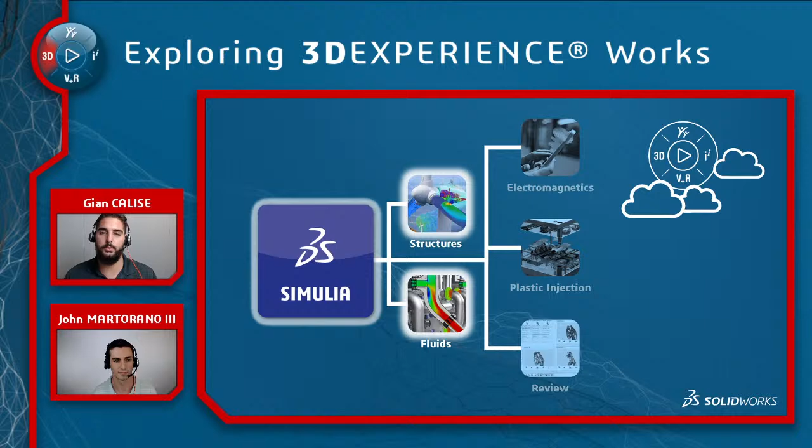But today we brought on a couple special guests to show structures and fluids. So that's what we're going to focus on today. To talk about those, we have Shreyas and Ramesh joining us to talk about structures and fluids today. So without any further ado, let's get you guys on screen.

How's everybody doing today? Hey, welcome, John. Hey guys, Gian. Hey John, Gian, how are you guys doing? Good to be here. Oh, great to have you. Yeah, good to be here. Great to have you. So Shreyas, you're our structures guy. Tell us a little bit about yourself, your background. What are we going to see today?

Yeah, absolutely. So today I'm going to show you some really interesting capabilities the 3D Experience platform has, specifically the structural mechanics engineer role on the 3D Experience platform. The data set I'm working with today is from a Formula SAE car, which is basically an impact attenuator assembly on a Formula SAE car. It's a front crash structure, so we are going to see that in action, and then see some tips and tricks as far as the structural mechanics engineer role is concerned. Let's see it, let's get right into it.

Yeah, absolutely. But before that, Gian, what I want to do is give our audience a quick high-level overview of different structural solutions that we have on the 3D Experience platform. The first one we have is called the structural designer role. Now, let's say you're a designer or engineer interested in doing a linear static analysis, frequency or buckling analysis, even thermal analysis. Then probably the structural designer role, our entry level offering, is best fit for you.

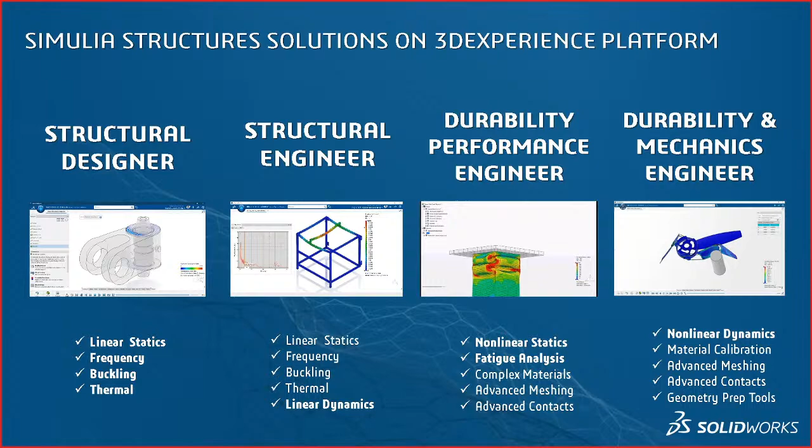And then we have our final offering, which is called the durability and mechanics engineer. This is our high-end offering. It comes with tools and features that will let you do a nonlinear dynamic analysis, and it also comes with a material calibration app that I am going to explain in today's presentation. So yeah, that's our structures solutions on the platform.

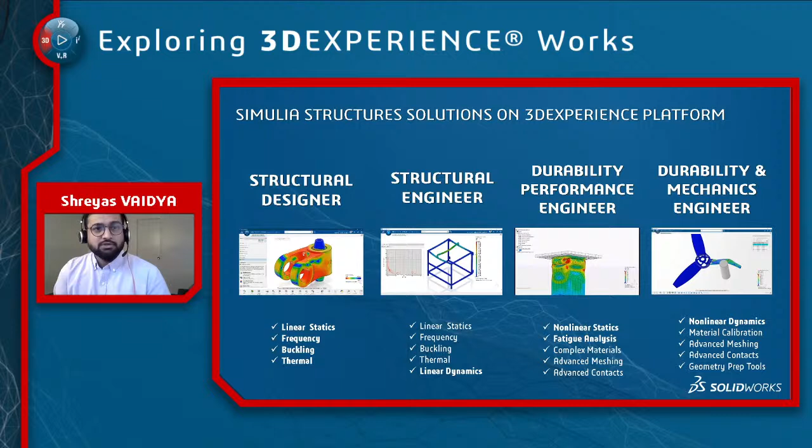So I want to give you guys a quick context about what Formula SAE is. I'm sure it sparked some interest in our audience. You may be currently working on a similar project, or may have worked on one in the past. Formula SAE is basically an engineering design competition where students from across the university come together to build a single-seater Formula style race car, which typically should look something like this that you see on the screen.

The challenge in these competitions is, look, it's definitely a race car, you want it to be fast, but apart from that the main goal is to come up with a well organized, well engineered overall package, backed up by a robust financial and sales planning.

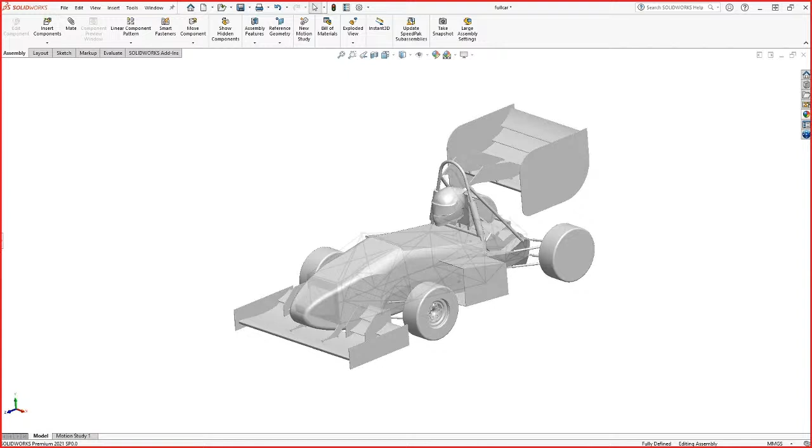So today I'm working with a data set called an impact attenuator assembly on a Formula SAE car, and I would like to give you a quick preview of what it looks like. We have a space frame chassis of an FSAE car, and then we have an impact attenuator assembly attached to the front of it.

What this really is, is a crash structure that has to absorb a certain minimum amount of energy and decelerate the vehicle in a controlled manner. So the physics we are trying to simulate here is: we have the rigid barrier, we have the foam, and the anti-intrusion plate that makes up the impact attenuator assembly.

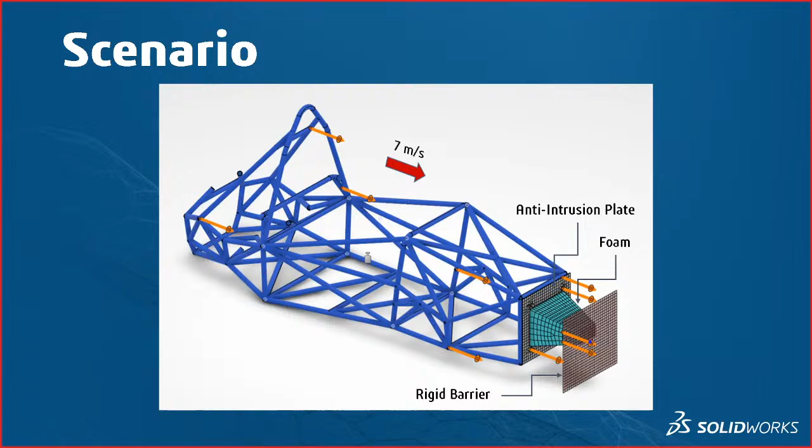What we are going to do here is crash this assembly into the rigid barrier at a speed of 7 meters per second. So that's the scenario I am trying to demonstrate today through this presentation.

Before we move further, I want to show you a quick visual roadmap of the 4 important things we are going to cover through this presentation, which I'm really excited about. First: Solidworks to 3DEXPERIENCE, how to transfer your model, your assembly, from Solidworks, which is your primary CAD tool, to the 3DEXPERIENCE platform.

Then we'll take a quick dive and look into how we can set up material from the test data that we have, and how we can calibrate it using the material calibration app.

And then I'm going to show you some interesting technologies that will be useful for you to set up your model, set up the scenario, and also show you some tips and tricks as far as post-processing our results are concerned.

And then I'll show you the workflow where we can go back to SolidWorks, make the design change we want based on the results that we got, and then come back to the platform again. So let's go ahead and start with our first important point that we want to see.

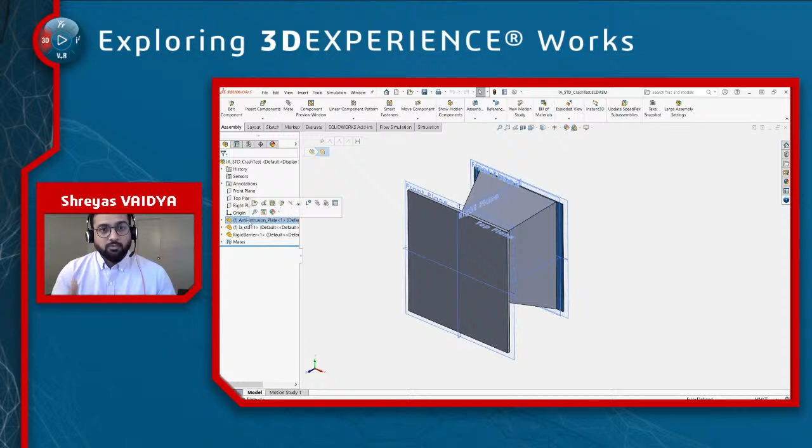So let's say you have an assembly in SolidWorks. In this case, we have an impact attenuator assembly, which also comes with a rigid wall. So we have the foam, we have the anti-intrusion plate.

So all I have to do is first make sure that we have the 3DEXPERIENCE add-in checked in. After that, it's really simple, guys. What we have to do is just click on the assembly that I want to take to the platform, and then through the compass on the top left corner, select an appropriate app that I want to push my geometry to, and that's about it.

Once you're on the platform, you can start with setting up the physics simulation, giving it a name, and creating an analysis case. In this case, we'll go with a structural analysis case, and then let's quickly verify if we have everything on the platform. So we have our rigid barrier, we have the foam, and then we have the anti-intrusion plate as well.

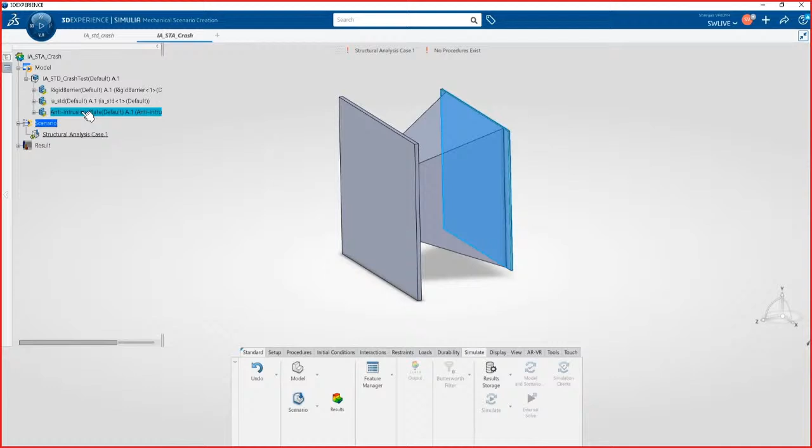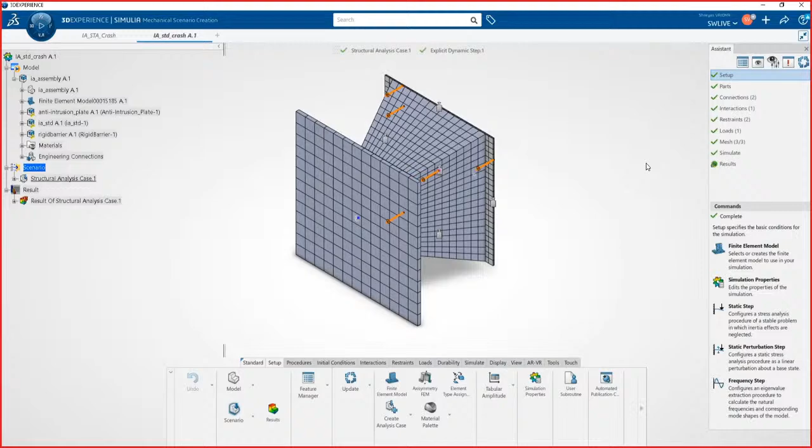Once on the platform, you have the option to follow an assistant. What is an assistant? It's basically an expert sitting right next to you. The assistant panel on the 3DEXPERIENCE platform has well laid out steps that guide you through the entire workflow of setting up the simulation, simulating it, and doing some post-processing. It's a tool that comes in very handy, especially if you're getting started with the platform, or in general if you're new to FEA.

Let's start off by assigning some materials. The platform has a vast library of engineering materials, but remember, we are working with a material for a crushable foam. For that, I have some test data. I want you to see how easy it is to get the test data into a material calibration app, calibrate it, create a new material, and then use that material in our simulation. Let's go ahead.

Quick question. When you're talking about your test data, are you talking about something like from an Instron, like pulling one of those dog bone samples?

Correct, and that's exactly what I'm going to show you right now, how we can get our data into the calibration app and then create a new material out of it. It's very interesting. Let's see it. I'm looking forward to seeing some stress strain curves.

The material calibration app, you can access it through the compass in the top left corner. We'll start off by naming our material, and we have data for a crushable foam. A typical data set could be in Excel form or in text form, both are supported. All you have to do is bring it to the platform and import it. Let's see how it's done.

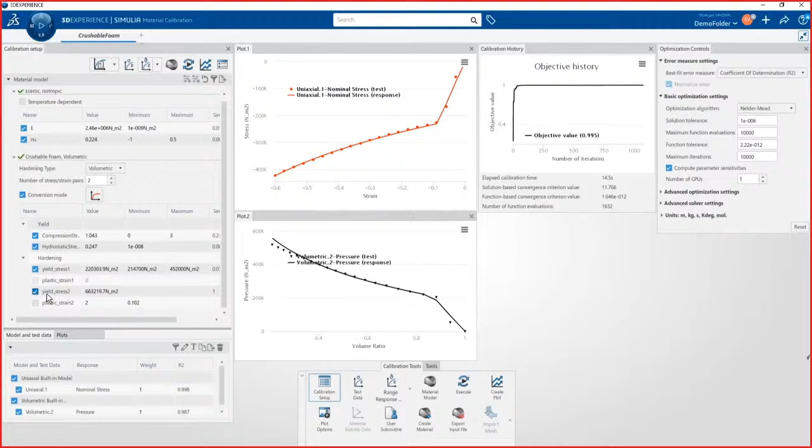Now we have our data here on the platform. A couple of different options we can play around with in the material model window are specifying the hardening type and the number of stress strain pairs on the curve. For simplicity, let's keep the number of stress strain pairs at 2 right now, and the hardening type in this case is going to be volumetric.

Another quick question for you. It looks like somebody was wondering, is the assistant you were talking about before similar to the SolidWorks Simulation Express wizard? I think Ramesh will have a good idea about this. Why don't we bring in Ramesh to answer this?

Yeah, it's very similar. The Express tools are great, but it also has a step-by-step process of walking a user from start to finish. It's the same concept, same workflow here with the assistant on the 3DEXPERIENCE platform. It does exactly the same thing, it's just more elaborate with more options because you're doing a full-blown multi-physics or large-scale nonlinear analysis. But the workflow is exactly the same.

While I have you both here, we just got another question wondering, is the data imported in SI units? I think the real question is, does it have to be in a certain unit to be imported?

Not really, so you can adjust that. That's good to know. Yeah. You can adjust that in the calibration app. Great. All right.

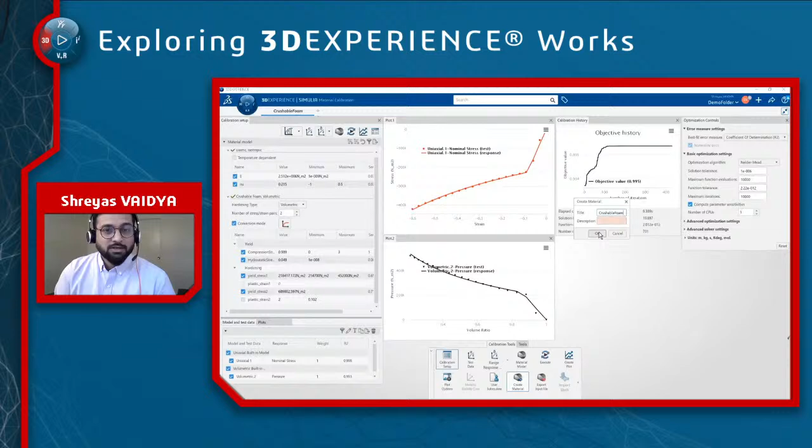All right. So let's go ahead and push the material to this current session, and then it's ready to be used.

Okay. So the next thing I want you guys to see is some really interesting meshing techniques that we have on the platform. We have techniques such as beam meshing, surface meshing, a sweep 3D mesh, which you can see on the crushable foam. And this basically helps you to define how these components are assembled.

We also have different mesh editing features. To name a few would be translate, rotate, or extrude. So through this, we can really transform and edit the mesh on a very local level. You can edit the nodes, you can edit the elements as well.

So the next thing I want to show here is a really interesting property that we get directly from Abaqus. This is called the general contact property. It is a global interaction property, and is a very fast and efficient method for specifying contact behavior between multiple components in your assembly, or let's say all components in your assembly. That's the range of the components that it can handle. So this property lets you define the default behavior of contacting surfaces during your simulation. So this is a really interesting technology that we have on the platform.

Okay. So typical data we can analyze from a simulation like this, simulating a crash structure, is how the energy values look. What I have here is three different energy plots: kinetic energy, plastic dissipation energy, and total energy balance. The kinetic energy is represented by the blue curve, as you can see on the screen, and the green curve represents the plastic dissipation energy. As the crash progresses, the kinetic energy goes down and the plastic dissipation energy goes up. The plastic dissipation energy is basically the internal energy that is being absorbed by the crash structure as the assembly impacts the rigid barrier and then rebounds.

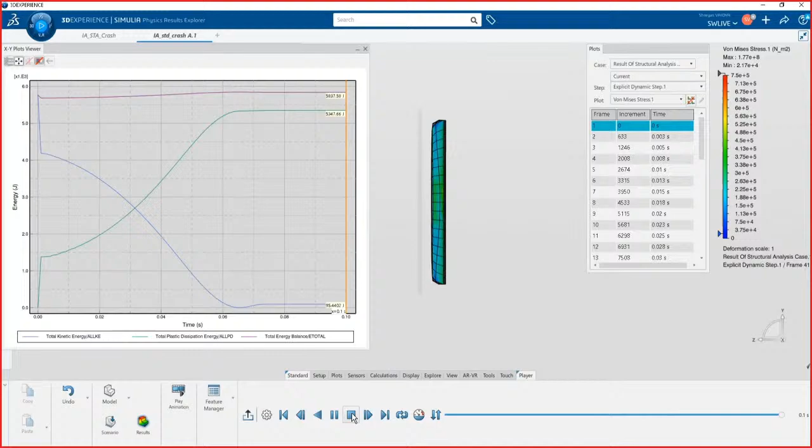So let's go ahead and quickly also take a look at how the velocity behaves, or what is the impact on the velocity as the crash takes place. What I have here is the velocity plot, which you can see on the screen. We had a constant speed of 7 meters per second at the beginning, and as the crash takes place, as the structure gets plastically deformed, it reduces the speed to a certain minimum value, and then keeps it constant, which is basically represented by the rebound as you see on the screen.

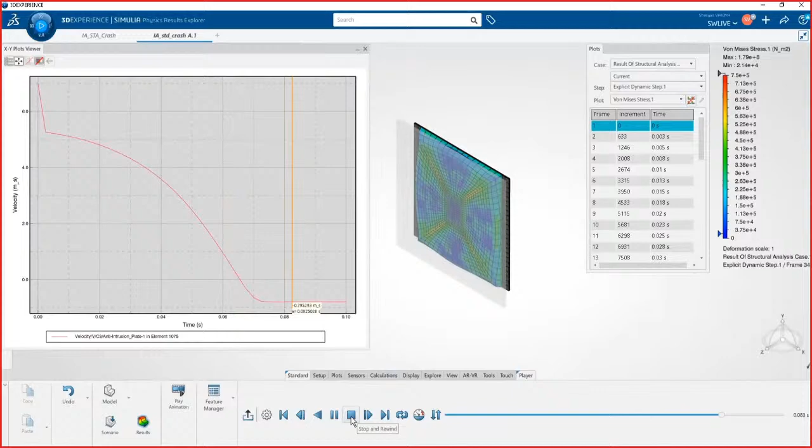Okay. All right. So now we are at a stage where we have some results, and we are ready to analyze those. Through the results we just saw, let's just assume that our design is probably overperforming a bit. So what I want to do now is go back to SolidWorks and make some changes in my design that I think will make my assembly more in line with what our team goal is. So let me show you how simple the workflow is. Let me show you how the design changes are done.

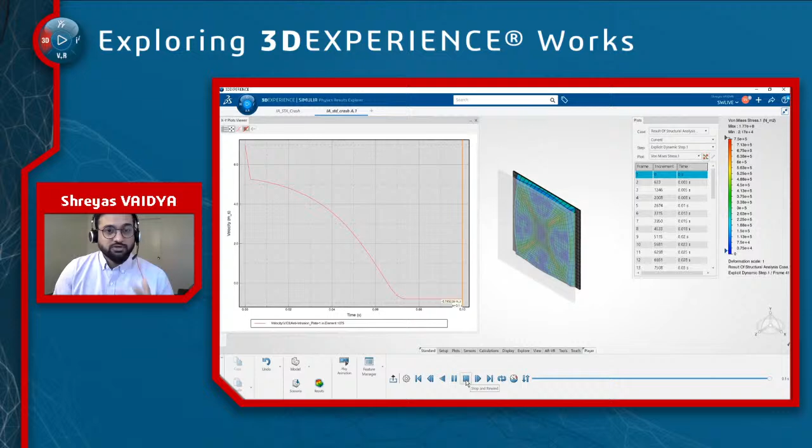Okay, so I go back to SolidWorks. What I have is my previous assembly here. I have the crushable foam. I have the anti-intrusion plate. Now, what I want to do is I want to reduce the size of my crushable foam, and probably make some changes on the draft angle as well.

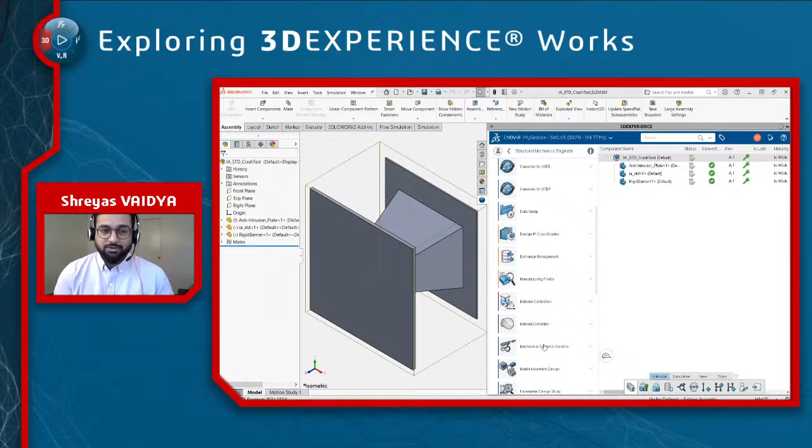Okay, so I have my revised iteration, which you see here on the screen, and I did not do any changes on the rigid barrier or on the anti-intrusion plate. So all I have to do now is go to the connector, select the assembly, and basically follow the similar process and push it to the mechanical scenario app on the 3DEXPERIENCE platform. And once you're on the platform, do a quick global refresh to update the individual components that you have made changes on, and there you go. You have your new geometry on the platform.

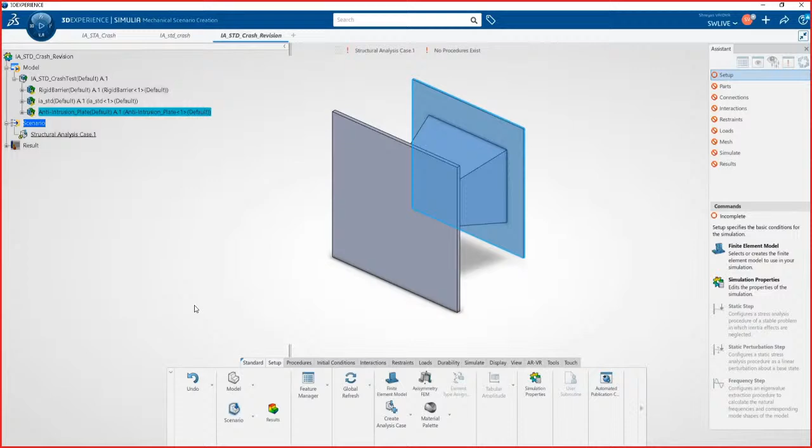Wow. So Shreyas, it's pretty easy to replace by different revisions of a component as well, right? Correct. Yep. That is correct. It's pretty much the similar workflow that you'll have to follow that I just showed. And once you're back on the platform, do a quick global refresh to update your components or update your assembly links. Cool. Yeah, I won't hold you up. Let's see how the second results go.

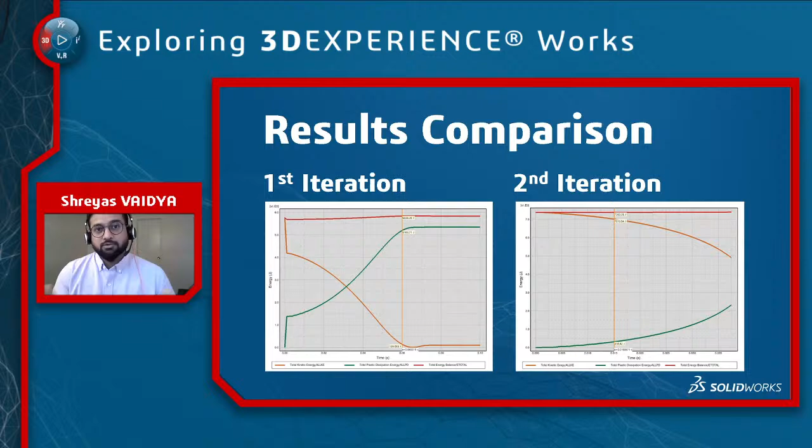So let's go ahead and take a quick look at how the energy plots look for both these iterations side by side. So you can clearly see from the second iteration that it probably hasn't absorbed the amount of energy that it was supposed to. There's really no limit on the number of iterations that you can do, but it again depends on what time constraint you're working in. So just for the sake of today's presentation, just for the proof of concept, I came up with two iterations, and then we have the comparison side by side.

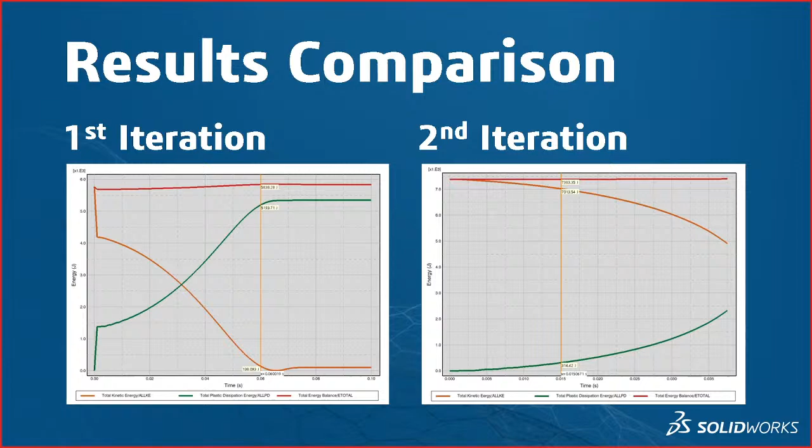I like your comparison here, and so it looks like the curves. So the orange one is the total kinetic energy you said, and green is the absorption through the foam. Correct. Yeah, it looks like it barely absorbs maybe 25% of it or so, and then the rest of the kinetic energy never reaches the bottom. So the rest of that would be absorbed by the frame, right? Yeah, and probably that's not good.

That's a really interesting observation, Gian, and that is exactly what I'm going to show you next. How scary it looks when you try and simulate the entire structure with the chassis. You can see the stresses and deformation transferring on the frame as well.

So look, I don't know about you, Gian, but I definitely don't want to be a driver when this happens. Yeah, that's a hard pass for me as well. Ouch. Such a cool animation though. All right. That's so cool.

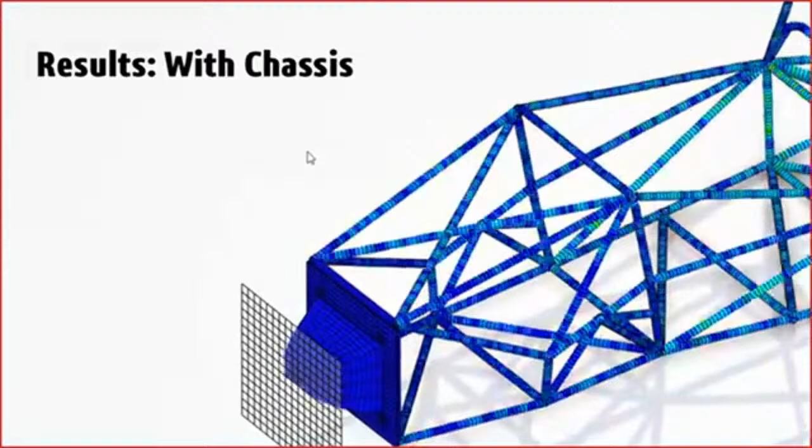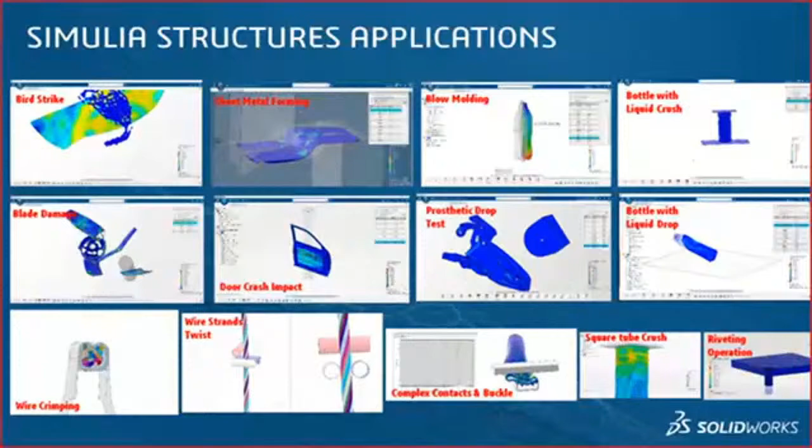Okay. So yeah, that's it, folks. That's it from my side. But before I hand it back to Gian, I want to show our audience some high-end capabilities, high-end scenarios that we can solve using the structures solutions on the 3D Experience platform. So just want to quickly check with you, Gian, if we have any questions from our audience, or just hand it back to you again.

Yeah, I think we have one question saying, this is cool. How can I be a simulation engineer? So kind of a broad question, but what do you think, Shreyas? Well, definitely, you must have a lot of interest in simulation to start off with, but then again, we also have different products, different structure solutions. So if structures is something that you are interested in, you can probably get started with using one of our tools, or there's also something really interesting coming up your way.

Just want to give you a quick teaser that's about CFD, computational fluid dynamics. So if you are interested in that, just stay tuned, and then you'll get to know some really interesting things about that. Yeah, I'm excited. Can't wait.

John, you're excited. For those of you who don't know, John's a pilot, so you must live for this stuff. Oh wow. Yeah, I'm hoping to see at least one aerodynamic example here. Yeah, it's coming your way, John. I know, I'm so impatient. Hey, let's get Ramesh back on there. How you doing, Ramesh? Hey, good. How are you guys?

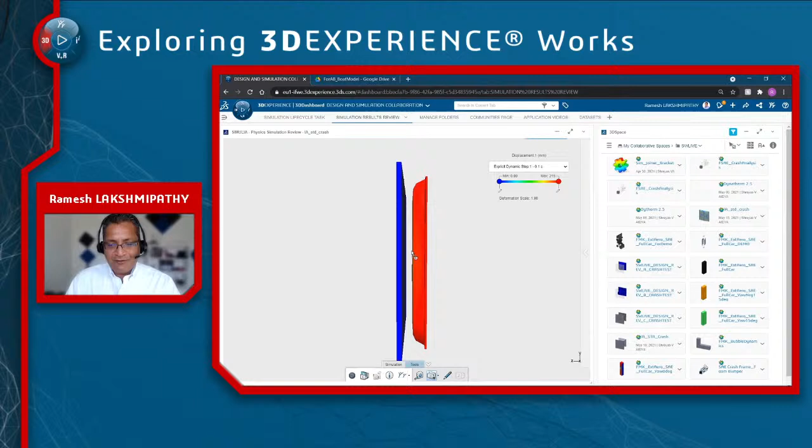But no kidding. So what I was able to do, guys, while Shreyas is doing the simulations, is actually pull his lightweight version of the simulation results and use an app on the 3DEXPERIENCE platform called Physics Simulation Review. This is a really cool app that you can use to share results and look at animations like the ones shown on the screen. It's a nice way to communicate analysis results with someone who might be part of the project but sitting miles away from you.

All you need is an internet connection and a browser, and you're all set. I can do this from anywhere, anytime. I can even do some markups. No downloads or anything? No downloads, zero download. Think about this like your SolidWorks eDrawings tool, guys. I think it's a little bit more powerful because you can do analysis animations, which is really great. But it's a lightweight version.

I don't want to open up Shreyas's entire simulation. I just want to investigate what he has done. I might be just a key stakeholder, but I can review what he has done and do some annotations and markings, a nice way to share information back with my team.

Awesome. Well, I'm excited to see some fluids, but it looks like we just got one question that I think you probably know the answer to, Ramesh. Somebody was asking if you can use 3DEXPERIENCE with the education version of SolidWorks. Good question. I'm not 100% sure, but we can certainly get back to that person offline. Let me do a little more research, unless our friends on the back end can find us the answer quick, so we'll come back to that one.

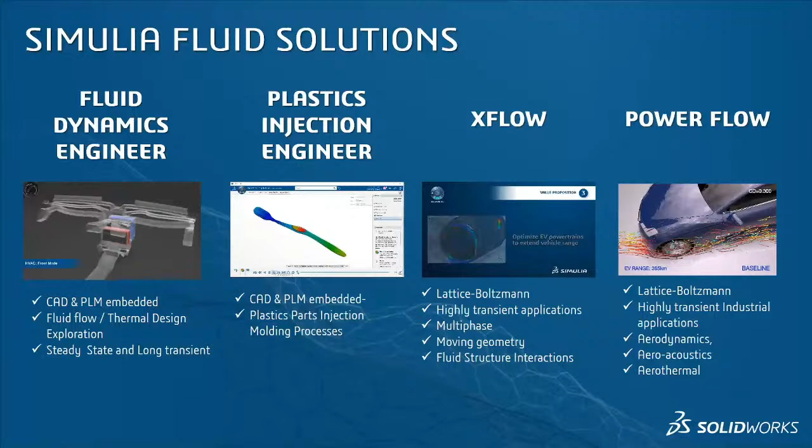Keep in mind, these tools can definitely help you out, whether you are in the transportation and mobility industry, aerospace, defense, high tech, and so on. We have simulation solutions that can help you solve your engineering challenges.

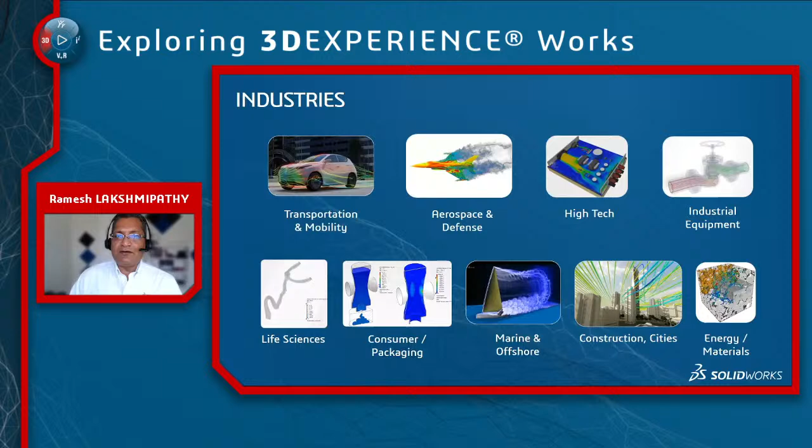So let's go ahead and focus on the mainstream CFD, fluid dynamics engineer role. I'm going to talk a little bit about the technology and give you a 30,000-foot overview of some of the key technologies, starting with the type of physics it can solve.

When it comes to turbulence modeling, we use a RANS-based turbulence model in fluid dynamics engineer. There are several turbulence models supported, such as Spalart-Allmaras, and some advanced models like realizable K-epsilon and SST K-omega. All of these also use intelligent near-wall modeling, which is basically a hybrid wall function approach. Depending upon the coarseness of the boundary layer, several algorithms are used by the solver to give us the accuracy and confidence in the results we're after.

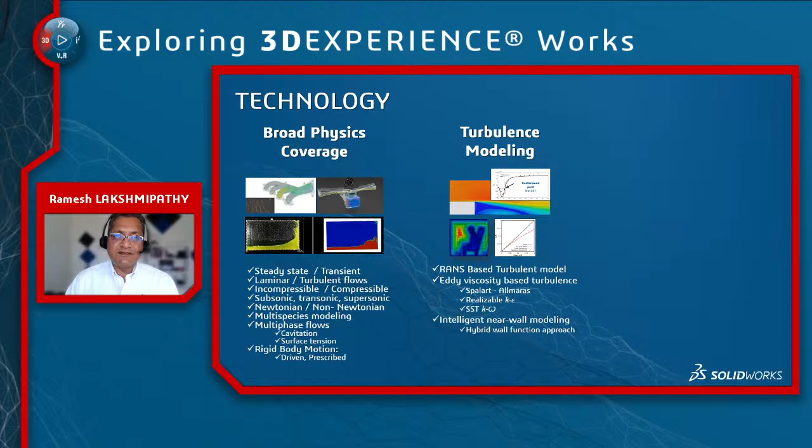And finally, meshing. Again, this tool is CAD-centric, so there's a lot of automation provided behind the scenes, but you can also take a deep dive into meshing if you have to. In terms of automation, it automatically extracts the fluid volume, automatically heals bad geometry, and automatically closes any open surface you might have, so that you're ready to start doing your simulations rather than trying to wrestle with the mesh.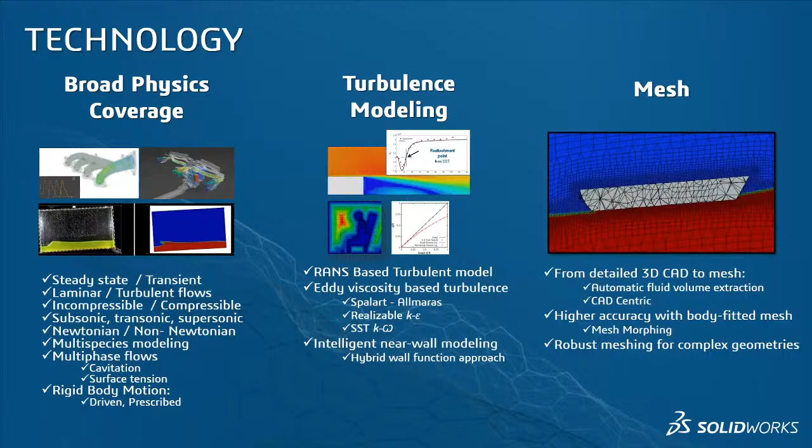All right, let's take a dive into the aerodynamics example for today. I got this formula-style race car geometry from Shreyas. Like any other CFD analysis, I want to start off very basic, laying the foundation. I want to simulate this thing going at 50 miles per hour, to simulate that effect and understand the physics.

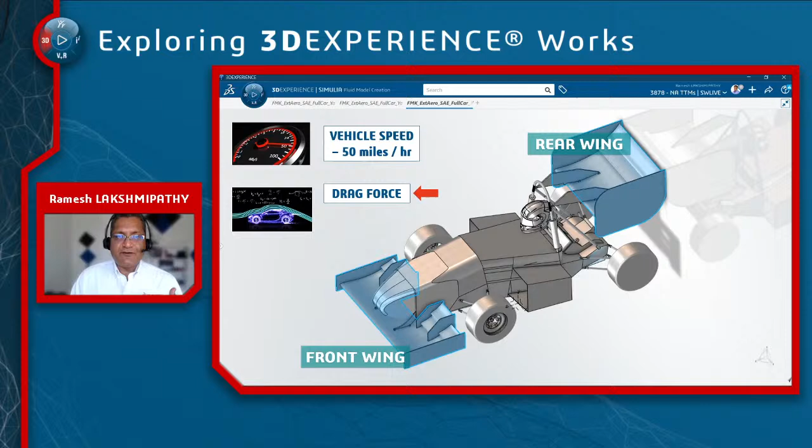The way you can be successful at simulation is to really focus on the critical parts of your assembly—what I call the crawl, walk, run approach. In this case, we just want to focus on, let's say, the front wing and the rear wing, while also getting an idea of what's happening on the entire body. But let's focus on these two entities. What do we want to understand? It's aerodynamics, so it's very obvious we want to look at drag forces, lift forces, and so on.

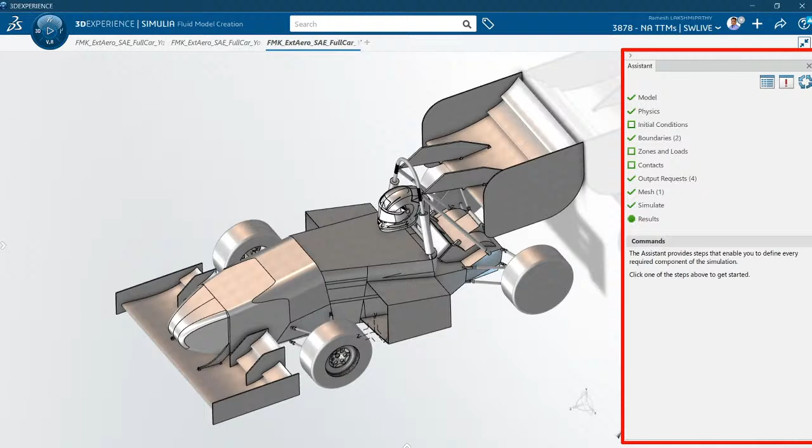Now what I want to highlight is how do we get started. Shreyas showed you and talked a little bit about the assistant—it's literally like an expert sitting right next to you. The same workflow exists here on the fluid dynamics engineer side. The assistant is such a powerful productivity tool because if you're new to using the tools in the platform, it can help you get started from day one or day two. So I want to give you a quick preview into how this works.

I'm not going to bore you with all the steps of this assistant, just give you a quick highlight. For example, I'm creating what is called a fluid domain, and all I'm doing here is telling it what geometry I want to include in my CFD analysis, as simple as that. This is an external aerodynamic application, so I'm going to create a bounding box, which is the volume of space around the geometry I want to capture. All I need to do is input some numbers.

So Ramesh, basically how do you define the box? How do you know how big to make it, and what exactly are you trying to capture?

When you're analyzing external aerodynamic problems like this, usually a lot of the physics of the action takes place downstream of the geometry, so you want to capture that downstream effect. In the direction of the airflow you have a larger length, and as a thumb rule to start, you can use 10 to 15 times the characteristic length of the geometry, to capture the wake region as much as possible. But the wake region also has a vertical height, so in the vertical direction we want to capture at least 5 to 10 times the characteristic length of the vehicle. That's a starting point, a guideline, but it really depends on what physics and how much of that physics you're trying to capture.

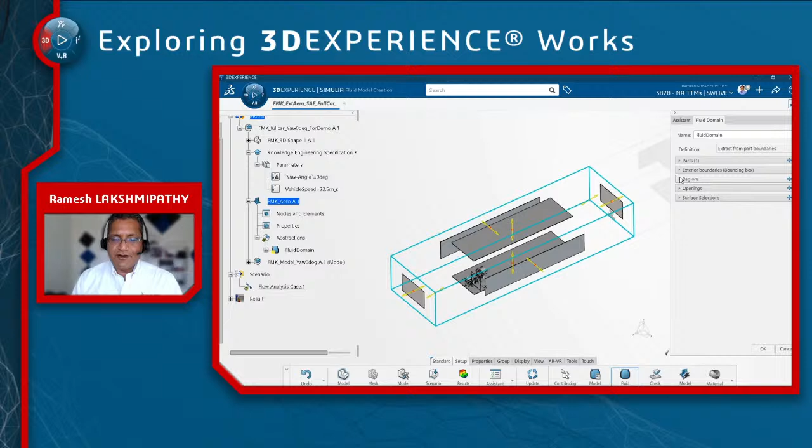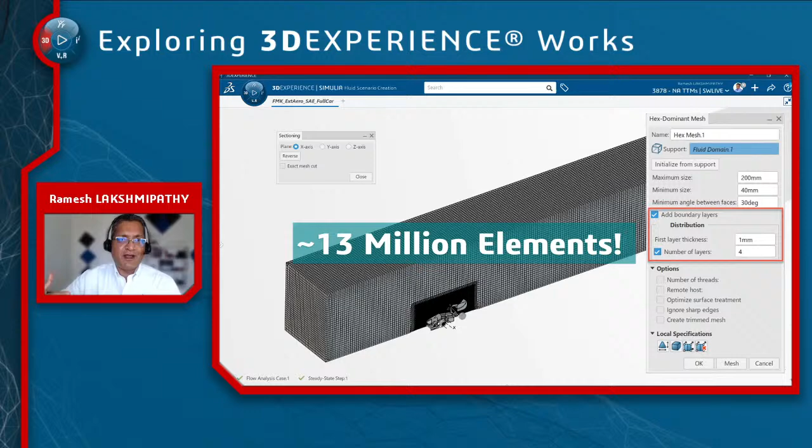In this particular model we have 13 million elements. I want you to keep in mind that when it comes to meshing the boundary layers, it's a super easy step. For example, you say here's my first layer thickness and here's my number of layers, that's it. The program takes care of the rest. All the crunching is done by the software behind the scenes, but on the front end, as a user, this is super easy for me to do.

So we have 13 million elements. What do you guys think, how long did it take to run this analysis? A day? At least 12 hours, I would say. 12 hours, yeah. Back in the day, if I was solving such a problem, it would have taken me days and weeks.

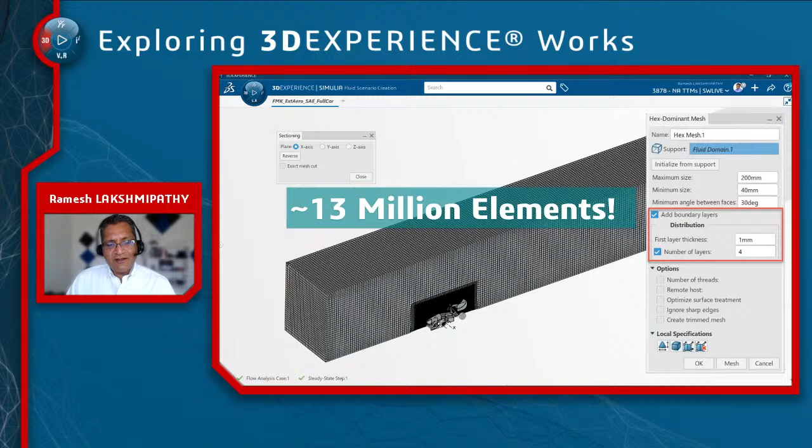But nowadays, that's the beauty of it, right? Today we're living in different times. We have the hardware infrastructure, and we also have the option to use the scalability of what the 3DEXPERIENCE platform cloud offers. So what I did was push this to the cloud and said, just go ahead and solve this on the cloud, and it only took about 37 minutes. It used 144 cores on the cloud and came back in 37 minutes to give me the result I want. This is a massive large scale problem that I can leverage the power of the 3DEXPERIENCE platform cloud to solve as fast as possible.

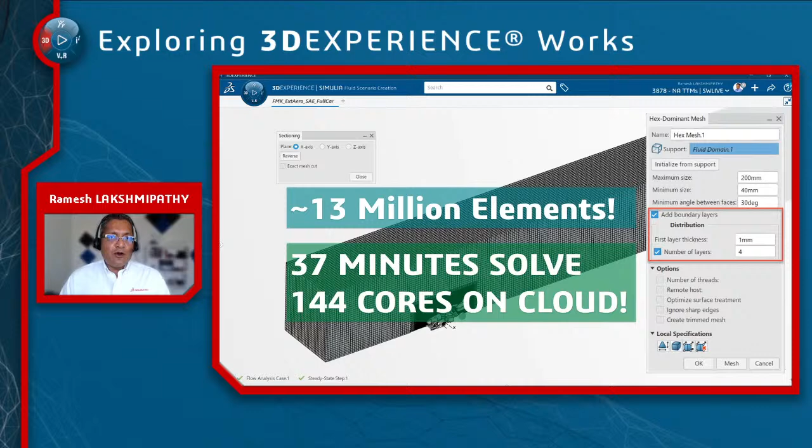And this is just one problem I'm solving. Imagine, when it comes to simulation, you're not going to take one design, one scenario, run it, and be done. You want to test multiple what-if scenarios: what if I change the geometry, what if I change the wind speed, what if I change the yaw angle? There are a lot of these parameters you want to analyze to get more data points, because the more information you get early on in the design process, the more you understand what your product is going to do in real life in terms of actual performance. That's only going to help you make good, informed design decisions.

But imagine this time, guys. 37 minutes, can't beat that.

Yeah, we even got some comments coming in from the chat saying, "No way, that's incredible." Yeah, it's tough to believe. Yeah, but I didn't make this up.

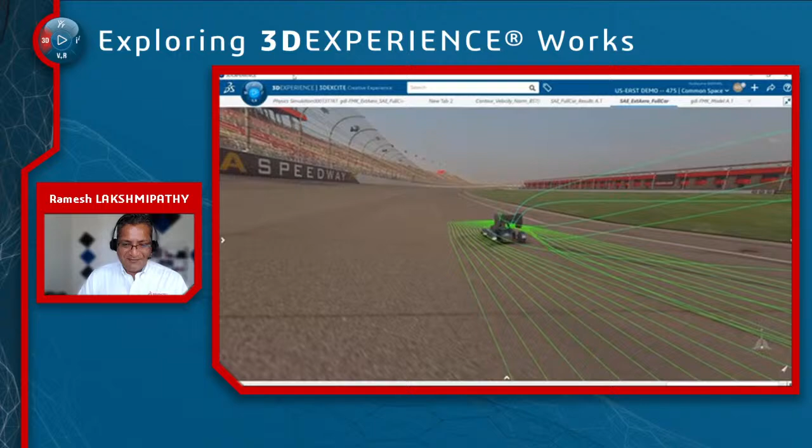This is the runtime, wall clock time, I got from the analysis. It's immensely powerful because it's not just about the number of cores, but also think about the cloud giving you access to a huge amount of memory, which the solver requires. If you have the hardware infrastructure in-house, you can mimic the same performance level on your local machines.

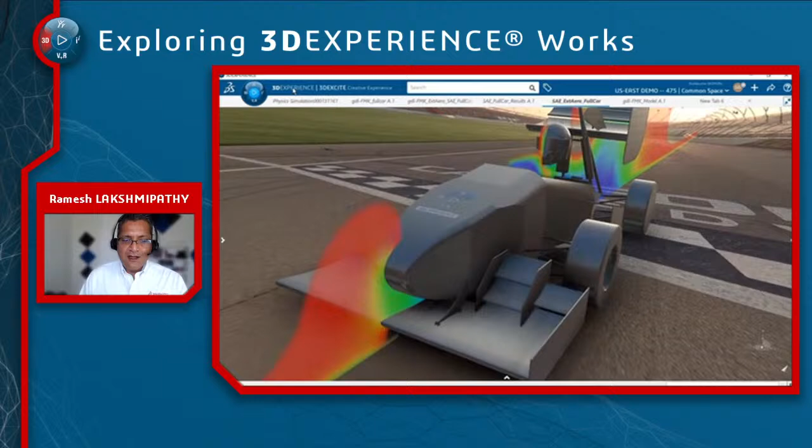So what you're seeing here is really cool. These are tools Fluid Dynamics Engineer offers on the post-processing side. You can create some really cool graphics, rich visualization, where you can not only look at results like a cut section of pressure or velocity, but also superimpose a background image, even impart motion to the vehicle and create really realistic visualization videos like this.

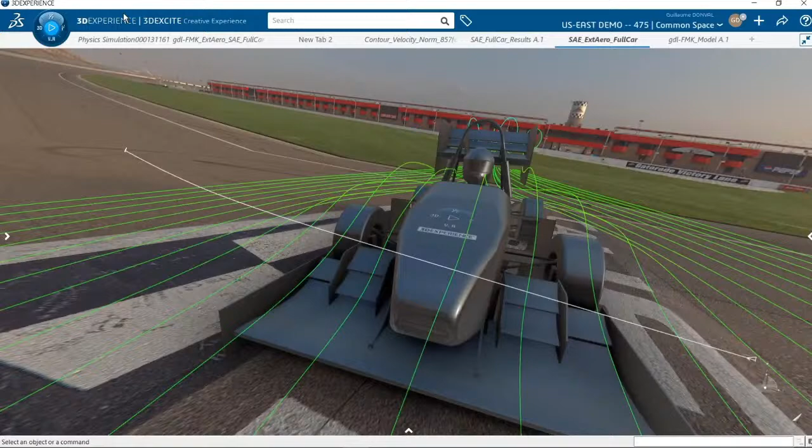It's nice to share something like this with your clients, your customers. It's not just a static image you're sending across, but you're giving them a more real, three-dimensional picture of what's going on. So you can really use the tools on the platform to do that.

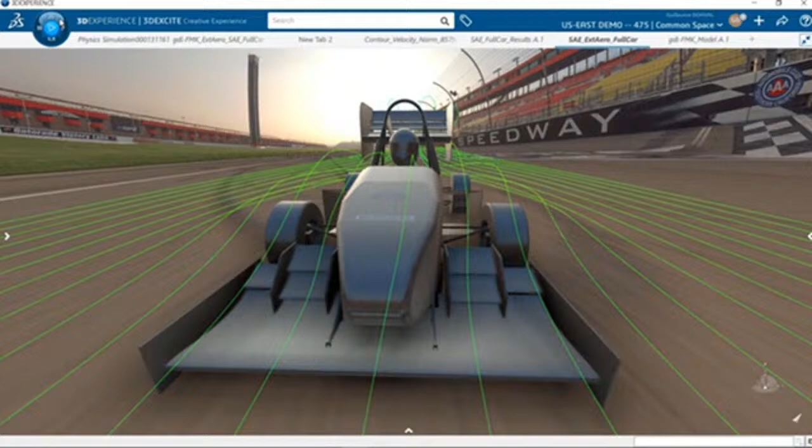So looking at cool pictures and pretty colors is good, but the question is, what data can I get out of the tool? How do I make my engineering decision? What sense do I make out of these contour plots, for example? Let's take a look at it one by one.

So on the front wing and the rear wing, I measured the drag forces and the down forces and got the efficiency, the L/D ratio, to see if that's acceptable or not. That looks pretty good to me. But let's take a moment to look at some of the results here.

So for example, what you're looking at is the turbulent kinetic energy. These gray areas that you're looking at are basically where all the high turbulent energy exists, and that is indicative of low pressure, or rather more of a recirculation area. So this can actually give us some good insight into whether that is acceptable.

A lot of times, not so much in Formula SAE, but in other race car competitions, this low pressure region could be taken advantage of by the driver of the vehicle behind this car. I'm sure you all know about drafting. There's a low pressure region they can take advantage of. You always see them tailgate the front car, and this low pressure region gives them a little boost, then they go to the side and overtake the vehicle in front of them. Very cool stuff.

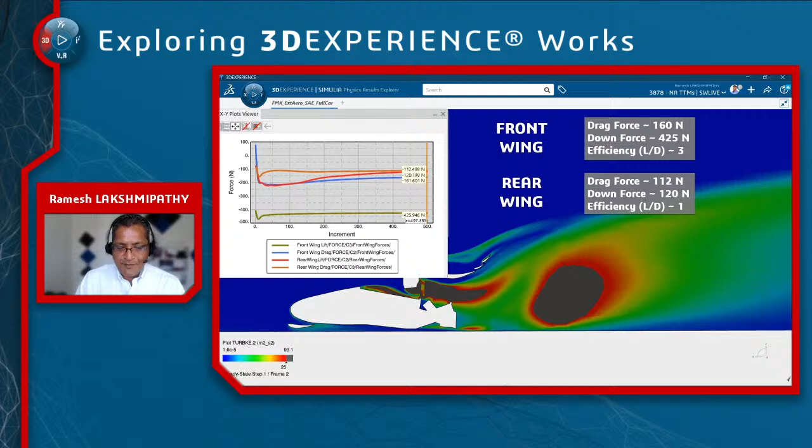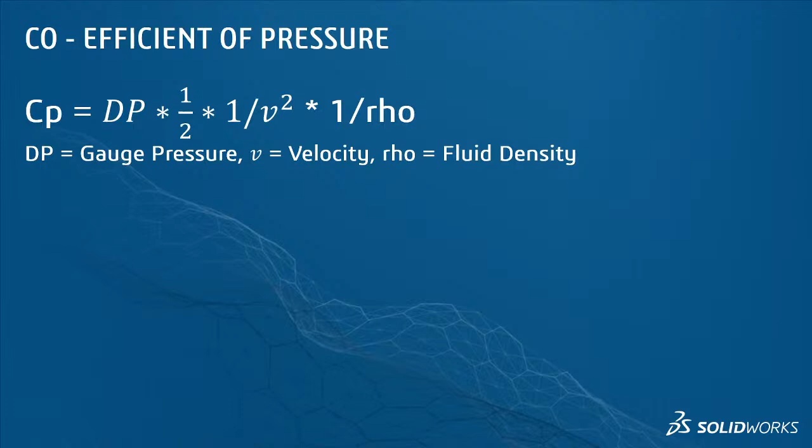So there's a lot of information you can get out of this plot. But what I want to focus on is a very powerful result called coefficient of pressure. There's an equation driving what this coefficient of pressure looks like—you don't have to memorize it, just think of it as a dynamic pressure. Why is this important?

Well, you can really hone in and use this result to improve the aerodynamic performance and shapes of your vehicle. Let's take a look. So right now I'm looking at the pressure in the system, but what I can do now is create a coefficient of pressure value that's driven by an equation.

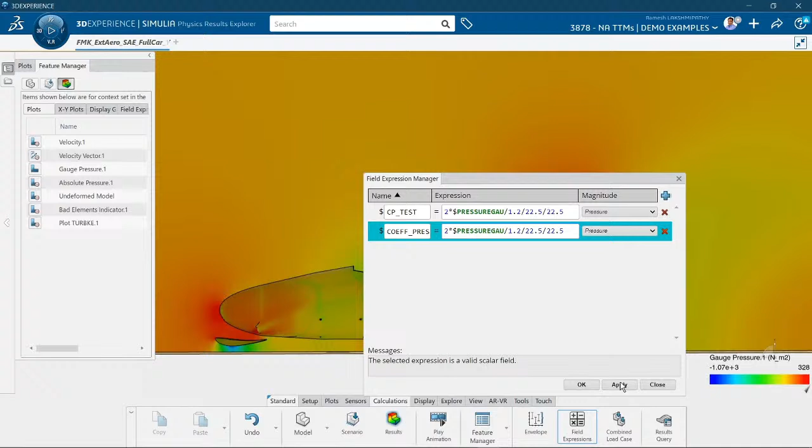In Fluid Dynamics Engineer, I can just input half rho v squared in the equation, times the pressure difference—I can do that very quickly. Once I build in that equation, I can create a new result plot. So I'm going to select my coefficient of pressure plot, and start by looking at what that looks like, what it means on the surface of the vehicle.

All right, so are we going to look at the high pressure or the low pressure? Both—we're going to look at both.

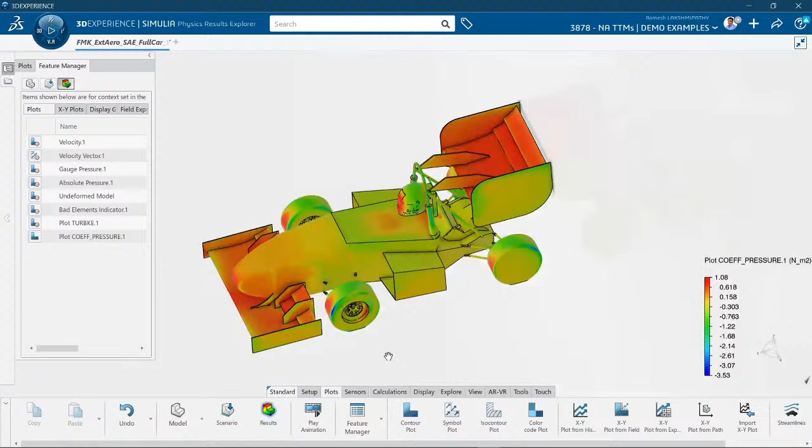So if you look at the numbers, what this chart shows is a value going from +1 all the way to -3.53. So +1 is really all the high pressure points, or the stagnation pressure points.

But how does that help us? If you look at the top surface of the front wing as well as the rear wing, you can see all the red there—that's really good. We have a high pressure region, and that makes sense because we want a low pressure region underneath this design, and that actually provides the downward force that we are after.

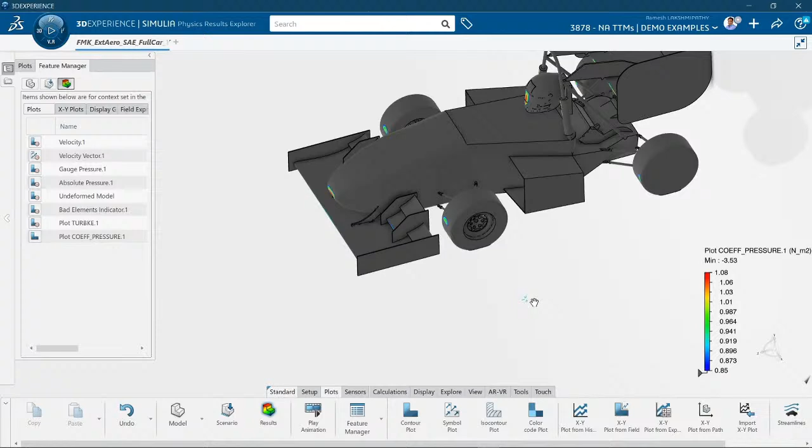We can also try to look at this in a different way. Let's say I want to scale this to just show the high pressure points—really where the air is just going to slam against the surface and come to almost a complete stop. Right away, I notice a red spot on the very front of this race car. So what can I do about it? I know the air is just stagnating there. Maybe I can change it—it's a flat elliptical area, and I can make it more pointy to try to alleviate that pressure point.

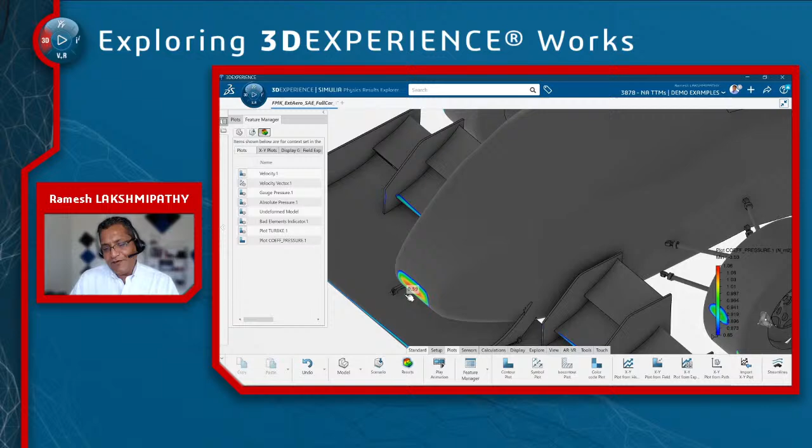But if I try to do that, what's going to happen? Shreyas is probably going to shout at me and say, hey, you can't do that because I want my anti-intrusion plate and my crushable foam there. So the design is there for a reason. Even though we are seeing a high pressure point, I cannot mess around with this design in this area.

So let's take a look at some other areas of interest, like the wheel area. There's a spot there, but in reality that spot is going to be somewhere lower—we're not going to see it right in the middle as shown here because I've not included any rotational effects on the car. But what I want to know is, for example, on these leading edges, what the pressure points are.

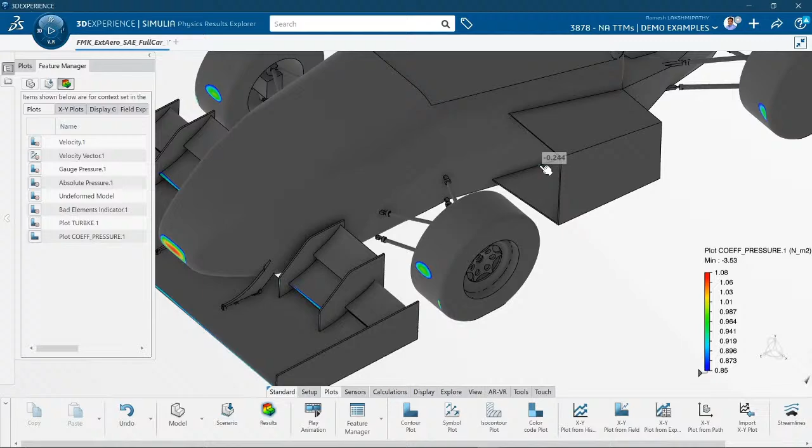That's as expected. But what I want to know is whether there's a free flow of air over the wings, over the tires, into the center wing where my mouse pointer is, because that's where the radiator is sitting. I want all the air coming in free flow through the radiator so it can cool the engine inside. If I see a pressure point in that center wing area, that's really a bad design, because it means I'm not going to have sufficient airflow reaching my engine. And what's going to happen? The engine is going to burn out pretty quickly.

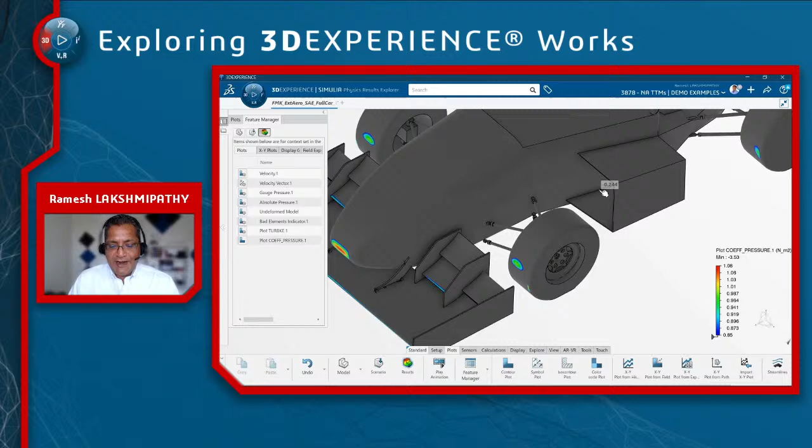So that's kind of the design decisions you can make by looking at this coefficient of pressure plot, utilizing the feedback we get from the software to make those design decisions. Here we've got some leading edges that are stagnation pressure points on the back wing.

It's really cool stuff, guys. It's not just pretty colors—making sense out of those pretty pictures is really, really important. That's exactly what a fluid dynamics engineer does.

Next, I can look at this in a different way by plotting all the negative pressures, negative values of the coefficient of pressure. That'll show me the entire wake, just like that. You can see how tall that wake is, how wide that wake is. Now I can ask, is that acceptable? Can I make the wake a little bit smaller and reduce recirculation areas behind the vehicle?

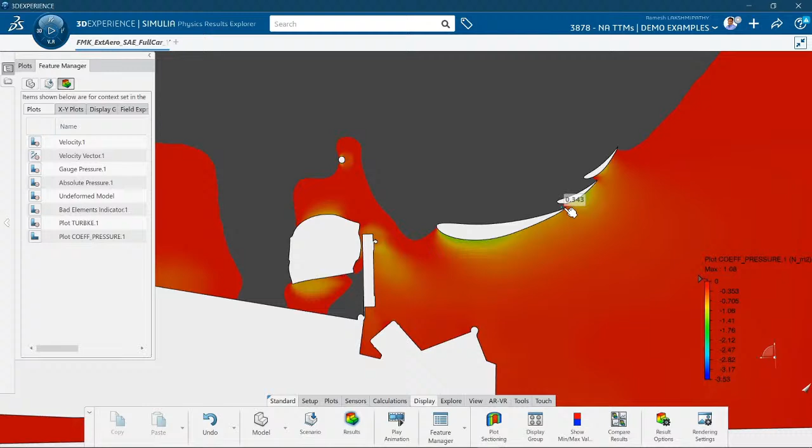Maybe I want to change the angle of attack of these inverted airfoils on the rear wing. So I can play around with some design options to see how that affects the overall physics of the problem.

Lastly, I want to show you what's happening on the front end side. This is looking at the velocity, and you can see the velocity underneath the front wing accelerates like crazy—it's screaming, almost like a Venturi effect on the underside of the car. Think about Bernoulli's principle again: higher velocity, lower pressure. That's exactly what we want—a downward force that'll keep the car on the ground. But it's very important to also understand what's happening underneath the vehicle and so on.

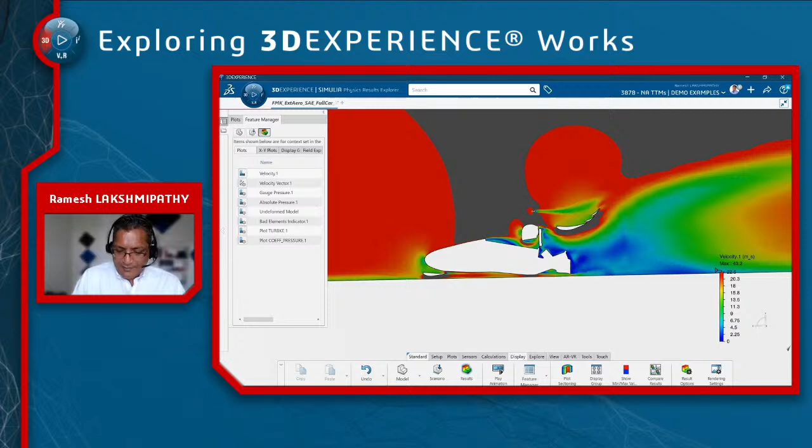So next, what do I try? Well, I can go ahead and look at the effect of changing some design variables like yaw angle, ground speed, angle of attack. There's so much we can do here. And the good news is when we try all of these in the context of a virtual simulation environment on the 3D Experience platform, it only helps us get more data points and understand what's going on in the product.

So Ramesh, changing that yaw angle, is that just like a turn when the car is turning? Yeah, that's about the vertical axis. It is actually simulating a cornering situation, maybe plus or minus 15 degrees. I want to see how that affects the performance of my vehicle.

But what's really cool is because I want to test multiple scenarios, I don't want to do it one by one. That becomes tedious and boring. But I can really take advantage of parameters on the 3D Experience platform. So I can create parameters for my yaw angle, my vehicle speed, my design, whatever we're trying to do. Then we let it run through those parameters on its own and give us the final set of data for all of those design candidates.

So what I've done is I've just summarized, for example on the front wing, the effect of changing the yaw angle for two different speeds, 50 miles per hour and 30 miles per hour, and how that affects my drag forces and my lift forces.

So I want to bring in Shreyas. Shreyas, you're the expert on this, right? What do you think about these numbers? Do they look reasonable to you, or what do you think?

Hey Ramesh, yeah, I think these numbers make perfect sense to me. Some really good numbers you're getting there. Definitely see the drag forces going up as the car accelerates. So that's good, you can see the difference there. Some parasitic drag, yeah, it's very obvious.

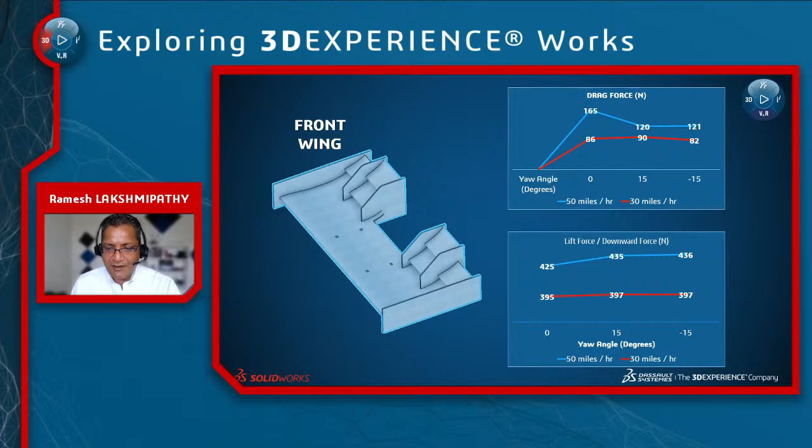And then on the drag force here, we see a dip at the plus or minus 15 degree angle. That could be because of the frontal area, now it's a reduced area facing the direction of the wind or the air. Maybe we see that dip a little bit, but the lift force is more or less consistent, just telling us that the design is pretty good.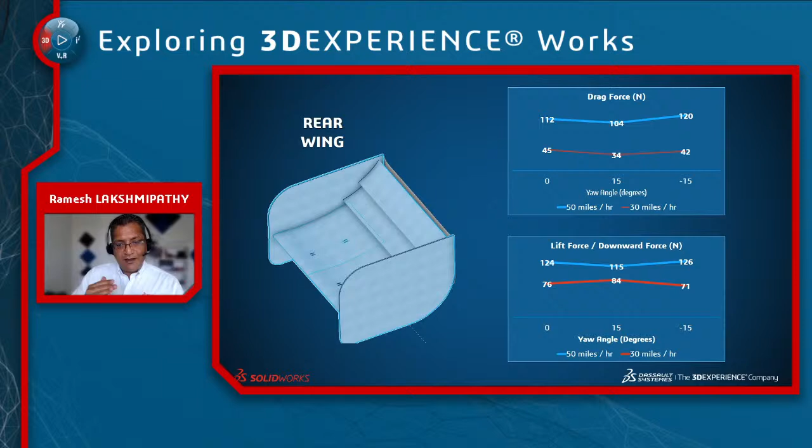So I did the same thing on the rear wing, guys. Same proof of concept. We see the same trend in terms of the drag forces and the lift force, or the downward forces. So this looks pretty good.

Okay guys, so that is, I know, hopefully a lot of information, but hopefully it resonated with the audience today. But let's wrap it up in the interest of time.

Just to recap, you saw the structures role, you saw the CFD, the fluid dynamics engineer role today, and both these roles on the 3D Experience platform have really been created with the designer in mind. That's why I keep iterating that it's CAD centric. It actually talks to your SolidWorks environment, so you can push design changes and analyze multiple what-if scenarios on your designs very quickly. You saw the technology both on the structure side as well as on the CFD or fluid side.

On the integration side, Shreyas showed how it's pushing a different design of the crushable foam from SolidWorks into the platform to do a new simulation.

And then collaboration, right? So in the beginning of my presentation, I was poking around when Gian said, hey Ramesh, just get started. I was poking around investigating what Shreyas had actually done. So the collaboration is really huge here, guys.

I mean, I can work now in a single environment instead of working in silos. If I want to share results, if I want to do some investigation into my team's project, I can simply pull data from the 3D Experience platform and work, do some markups, and send it back to my team for review. So there's a lot of collaboration you can do on the 3D Experience platform.

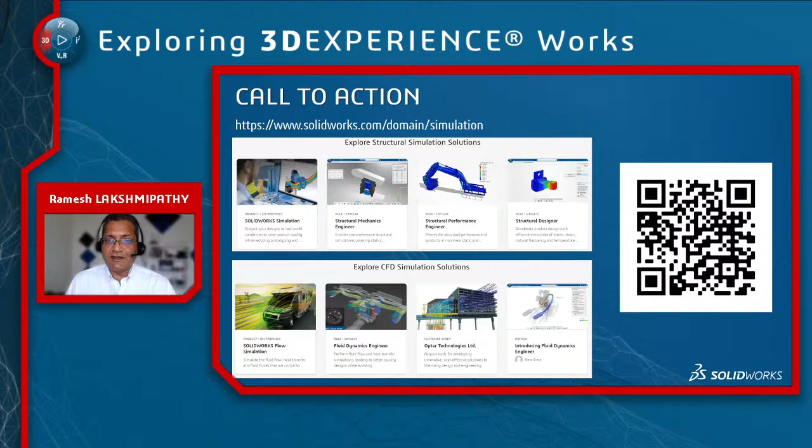Thank you, Ramesh. Yeah, I mean, thank you both so much. I'm really amazed at how much you're able to see. I mean, air is an invisible fluid, and to be able to visualize it like that is truly valuable. And then also same thing with Shreyas. Your crash test, it happened so quickly. There's no way that anybody could actually visualize that in their mind. So I think that's amazing, the insights you can get from the data in such a short amount of time.